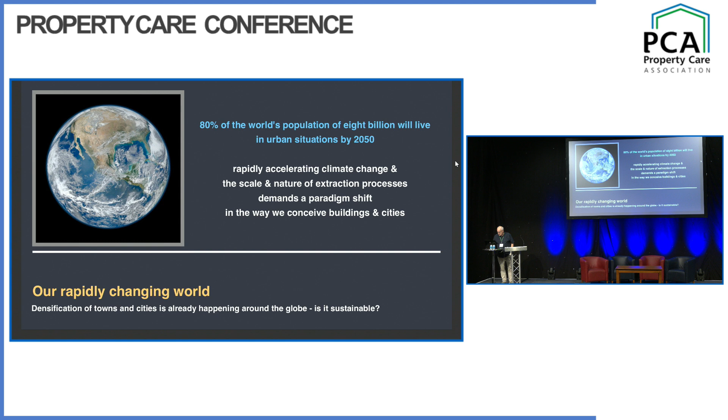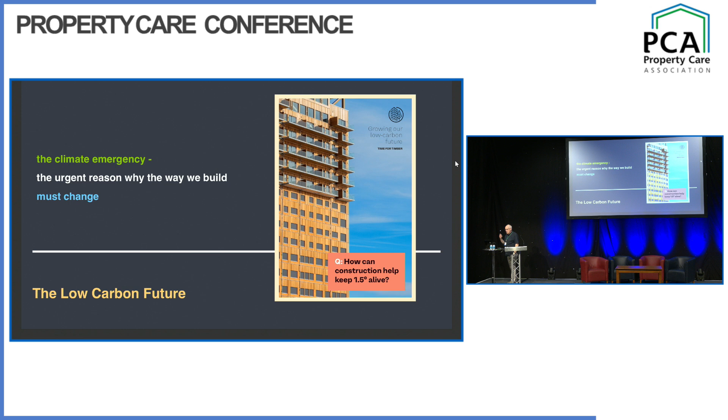So really what we're looking at is, how does this affect us? Now, this is the reason: the low carbon future, we're really serious about it, and whatever dates politicians set for it, how do we achieve it? And we're not achieving it the way we're going about it at the moment because we have an energy crisis, we have a climate emergency, Brexit, post-COVID, cost of living, but in the UK we also have damp condensation, poor thermal insulation, poor air tightness, poor construction quality, and inappropriate use of materials.

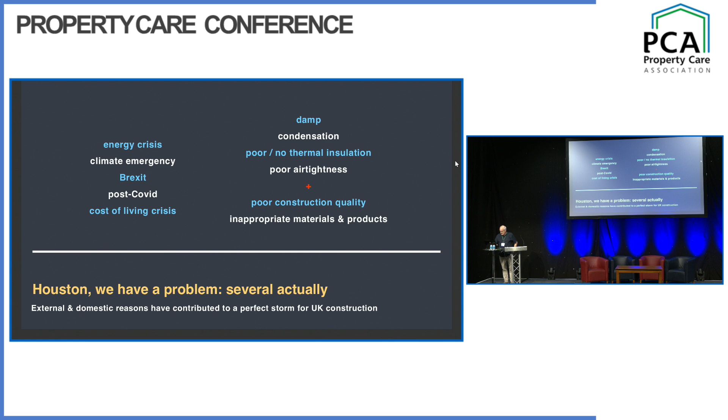So, lots of things to consider, lots of things to get right, and for the PCA members, lots of things to earn income from.

Way back in 2016, Mark Farmer wrote a report for the government, Modernise or Die, and it was absolutely jaw-dropping in terms of saying, if we don't change things, if we don't change the way the industry works, if we don't change the way we use materials, and if we don't train people in the skills necessary to do these things, we have no hope. In 2021, in the subsequent report, nothing had changed. And this is true throughout the UK construction industry. For years, Latham, Egan, all these kinds of reports came out saying we need to change.

Nothing changes unless legislation changes. That's the reality. When legislation changes, everybody in the industry decides they need to know and need to get on with things. But without it, you can't expect much to happen. And so we have a problem, because if we're going to, by 2026, achieve many of the things that were in Mark Farmer's report, we really have a lot to do.

So why mass timber? Now, mass timber, I'll explain what that is in a minute. But there are new imperatives. I mentioned some of them already: circular economy, yes of course, use of renewable materials. Timber is number one in that kind of world because we can grow more timber. Off-site manufacture is certainly more and more important to get accuracy, to get precision in building, to get speed of building, and less deliveries on site, all sorts of things.

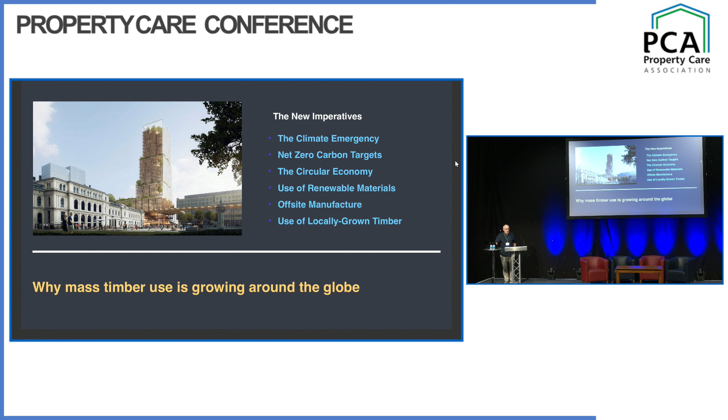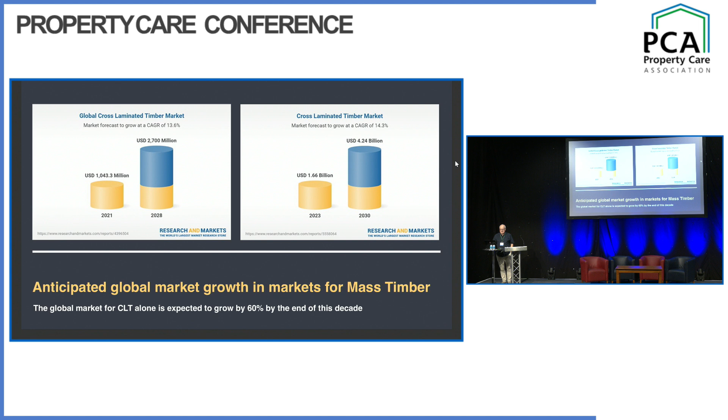And this is why, because you can see the growth here in the market for mass timber. These are two charts looking at just CLT alone, cross-laminated timber alone. But the market internationally is growing phenomenally. It's not so much growing phenomenally here because Grenfell set everything backwards. Regressive legislation after that affected timber more than anything else, although there was no timber in the building. But that's the way regressive legislation works. So, what is mass timber?

Now, there are different characteristics to each of these things. I'm not going to go through that. I'm just going to show you some of them.

Nail lamination, that's basically how it works. Stack board on board, stick nails in. I'm working on a project at the moment to use wooden nails, so we don't use any steel at all. There's a whole world of what we're trying to do with wooden nails. I won't bore you with that.

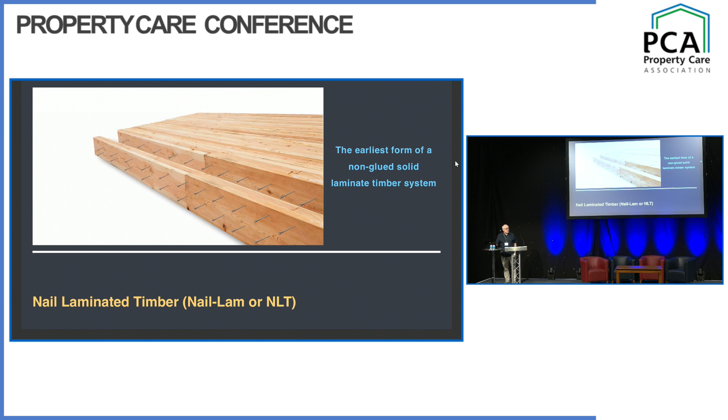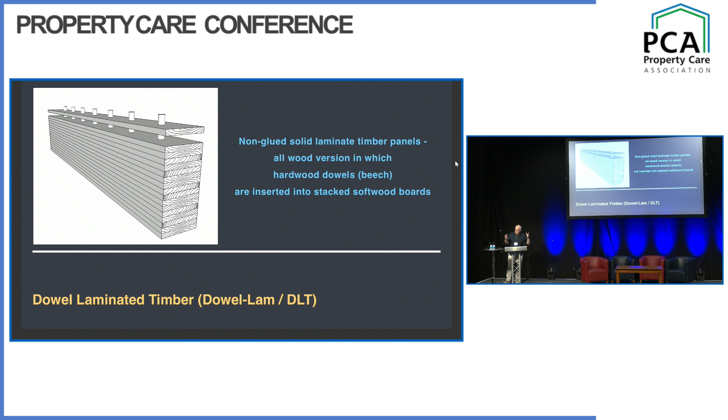Dowel lamination, it's kind of the same thing, but we drill holes and put hardwood rods into softwood. The difference in moisture content means that they lock together once they reach equilibrium moisture content.

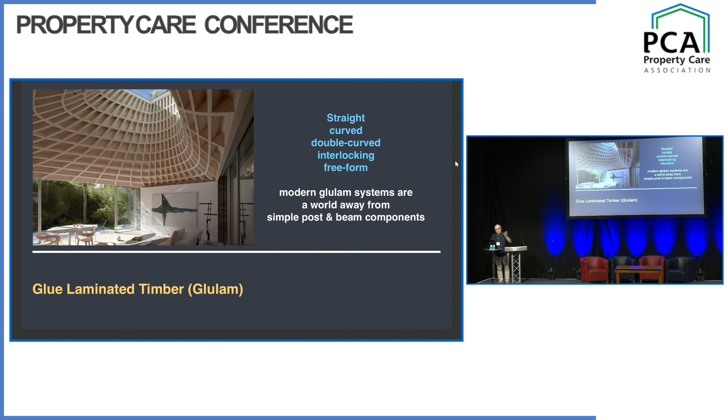Glue lamination, you've probably come across it, but there are lots of different types looking at straight, curved, interlocking, and so on. Some fantastic buildings emerging here in Britain and around the world, really pushing these technologies forward.

And cross-laminated timber, this is just one example, but you might see it as just something new, something that's a fashion item that we don't need to know about. You do need to know about it because it's the fastest growing construction product, I think, anywhere in the world at the moment.

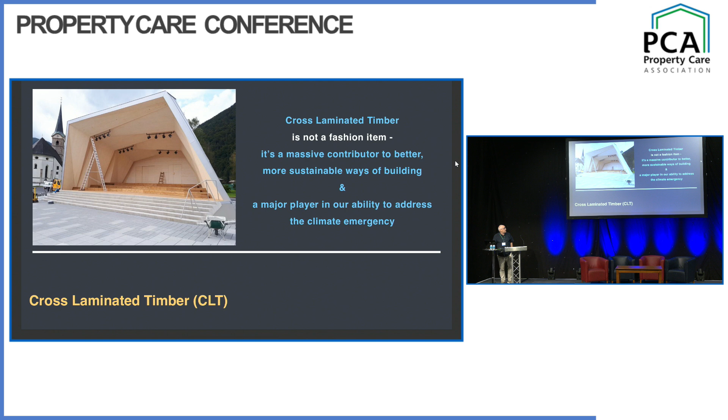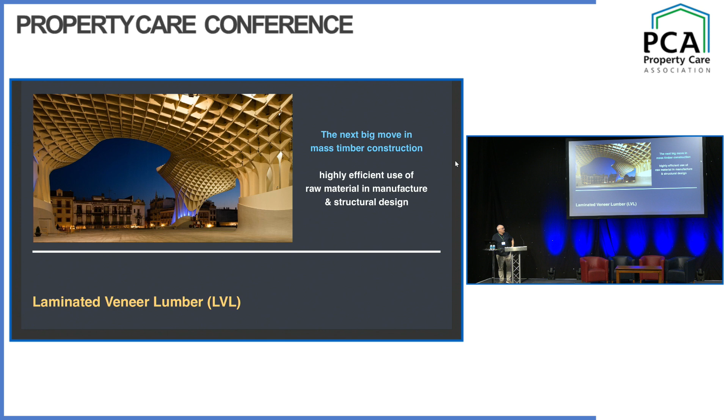And then laminated veneer lumber. So I'm showing you sort of extreme examples of what's being done with these technologies. There's a lot of simpler buildings around, but these are the ones that I think are pushing the boundaries, pushing the research, pushing the technology.

And there are lots of reasons, advantages, benefits for using these products. I've listed some of them there. I'm not going to read them all out because I've only got 20 minutes, and if we want to get out before it's dark, we'll need to crack on.

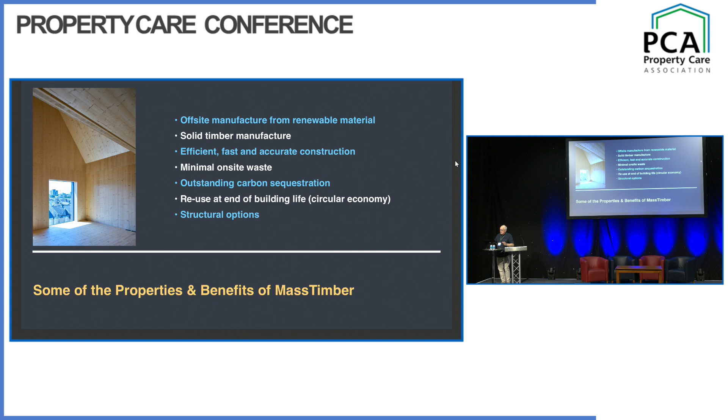There are plenty more properties, but I think reduced weight of the buildings, reduced deliveries to site, carbon sequestration is a big part of it in terms of locking up carbon for the future.

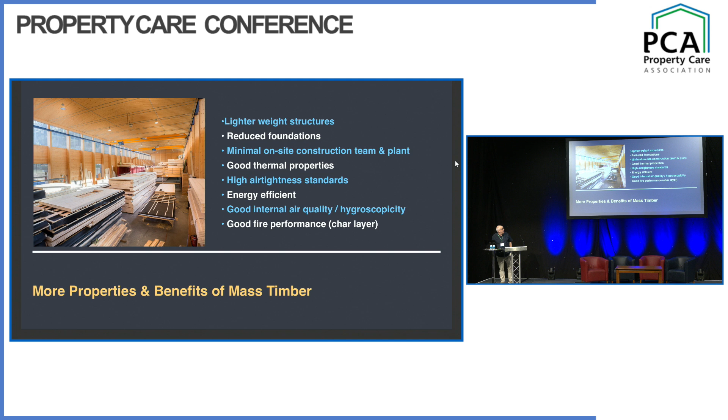Very high air tightness standards, very good thermal efficiency, and this came up earlier talking about schools and so on. I wanted to put this in to say, when you expose mass timber surfaces, big thick panels of wood, but you leave the surfaces exposed, you get the benefits of wood's hygroscopicity. You get the wood kind of absorbing moisture, releasing moisture, very good internal air quality.

And there are lots of carbon benefits. I'm not going to run through this because this is for kind of consenting adults only about how you construct the buildings. So we won't bore you with that. I do courses in that. That's quite separate.

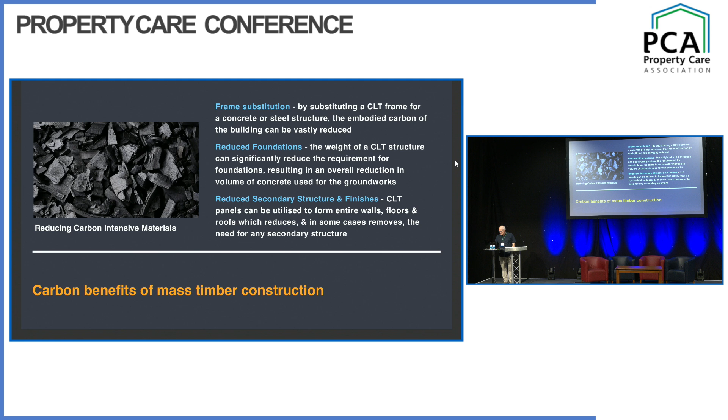But what is cross-laminated timber? Basically, we take strips of wood, we put them together, we glue another layer of them at right angles to it, and so on, until we build a panel.

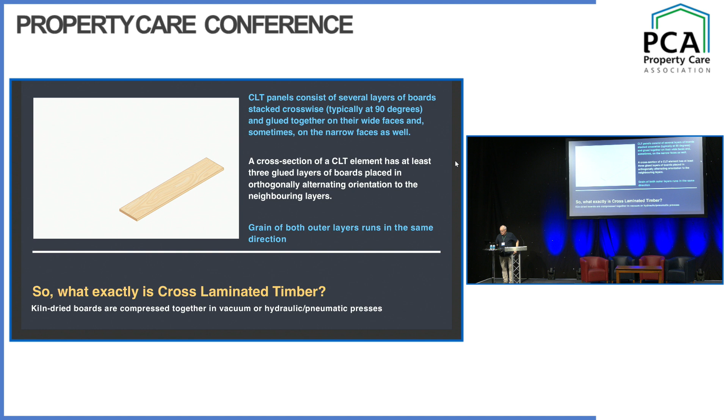And you can see some examples of these here. I haven't got a pointer. I don't think, oh, I do have a pointer. So these are different layups of, you usually have odd numbers so the outer faces of the panel, timber faces in the same direction. I'm not going to give you a whole lecture about this, just to show you some examples, because when we come on to it later about issues for PCA members, you'll see different types of things here.

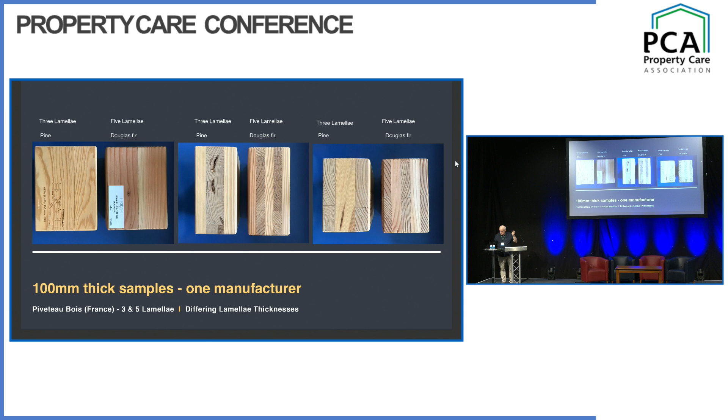Now, if I go back one, you'll see here these are glued down those kind of lines. They're not necessarily glued across where the wood crosses, and we'll come on to that. In this example, they do get glued across there as well as across there. That's important, and I'll come back to that.

First CLT building in the UK. People keep telling me, people in the industry who've never used it and so on, say well, this is new, this is risky. We've been doing it for 25 years. It's not new, it's not risky. In fact, when people use it and they begin to realize how efficient it is, they become kind of evangelical about it, maybe too evangelical.

Excuse me, I'm looking around here. Oh, what is it? Oh, can of water. Who knew? Give me one moment.

Got to keep going, 20 minutes.

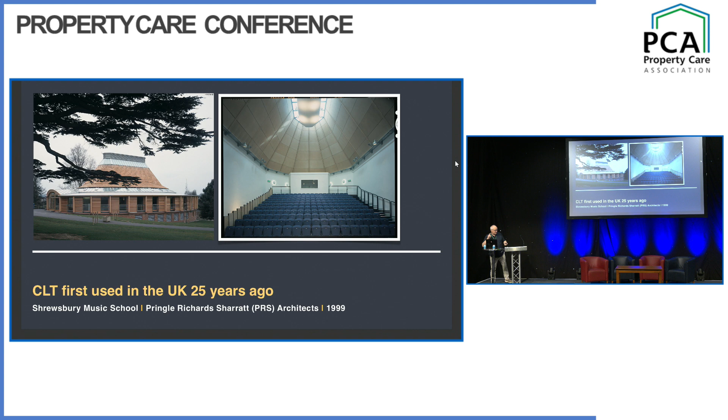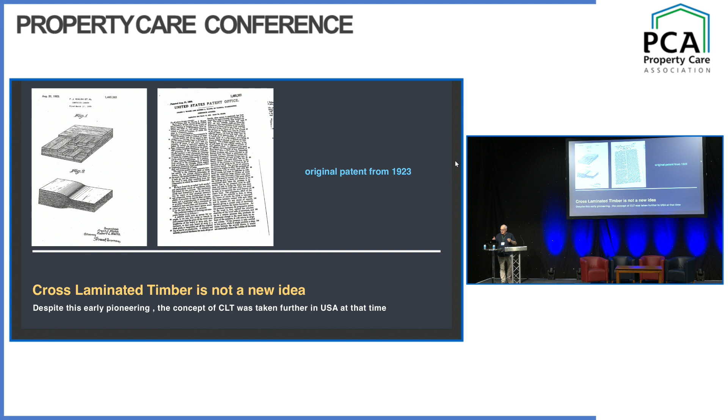It's not a new idea either. It's been around since 1923, so 100 years, when it was first patented in the United States. Unusually for the United States, they didn't take it much further at the time. They're going at it like a dog at a bone now, building factories everywhere and huge amounts of buildings, particularly tall buildings, in mass timber all over the States, changing the legislation from state to state to encourage more timber building. We've done it the opposite way around - we want to discourage it at the moment, and that's really not the way the world's moving.

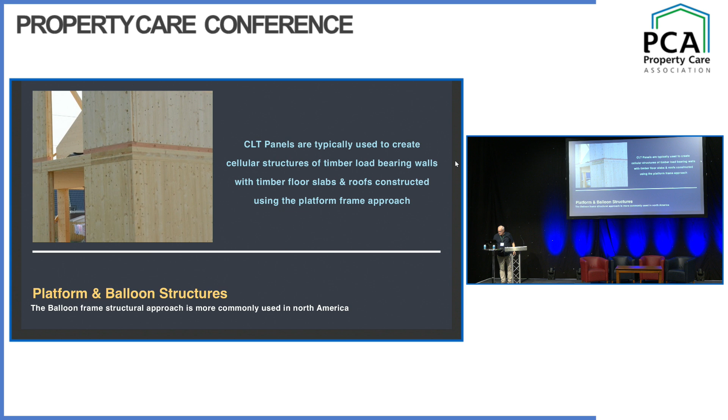So basically, you see how it's constructed: wall panels, floor panels, basically platform frame construction, for those of you who are interested in that. Stability - you can see in this example, this was the first tall timber building in the world for residential structures. It was 9 stories in London, East London, and it's kind of a honeycomb structure, so the loads are all distributed, so it doesn't suffer from a thing called progressive collapse. It's a very efficient structure, but this changed the world.

Around the world, as soon as this was built, way back in about 2012 or so, maybe a bit earlier, engineers started looking at it and designing 25, 30-story timber buildings. And that's the way the world is moving now - we're seeing buildings that are more than 20 stories high, purely in timber.

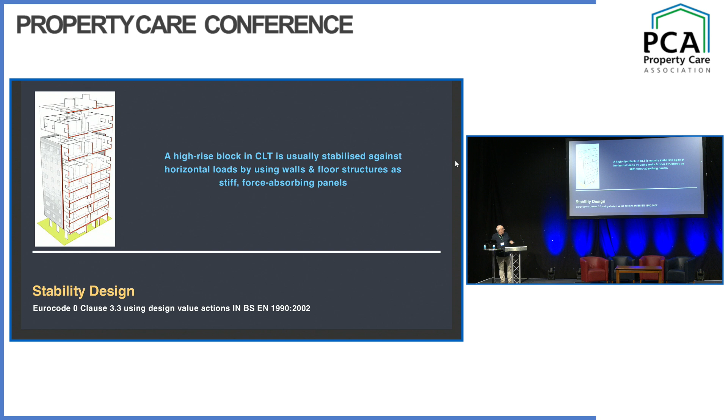Then the elephant in the room, Grenfell. As I said earlier, there wasn't any timber in Grenfell, but the legislation that came in England and Wales said above 18 metres, the whole wall construction needs to be non-combustible. For those of you who understand the nature of building construction, you realise how laughable that statement is, to get all the layers in a wall to be non-combustible.

But this is 10 stories in London, and London was leading the world in terms of tall residential structures - solid timber, everything there is solid timber. Then Grenfell changed things, and we began to realize that we have different areas of construction in terms of timber. We have low and medium-rise buildings, high-rise, distinct structural technologies in terms of lightweight structures or mass structures.

Three risk groups, because different things need different kinds of consideration in terms of insurance. The particular things we're talking about here: susceptibility to fire and moisture, durability and repair, concerns over quality of design, concerns over competency - this word comes up all the time. And that partly goes back to what I said earlier: if you're not trained in it, you're not competent in it. That's what we need to change.

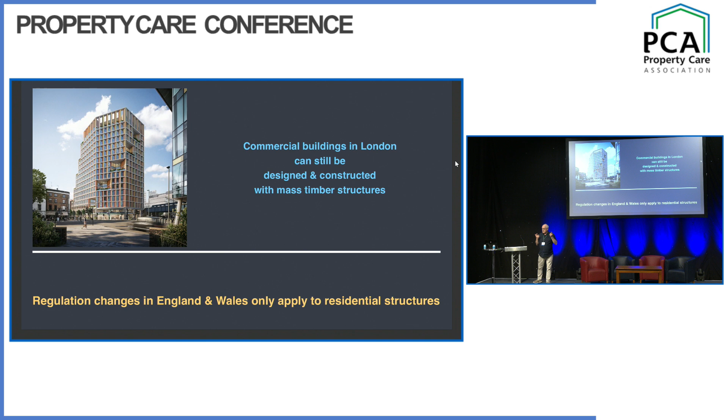So the regulations that came in - and I keep hearing it from people, 'well, we can't build higher in timber' - the regulations only affect residential structures. They don't affect commercial structures, because those are still happening, and they're happening taller. So there's a kind of contradiction there, but I'll leave that with you.

And most recently in London, hardwood laminated veneer lumber. This is a frame that's completely made of hardwood. Laminated veneer lumber is little thin 3mm strips assembled like glulam, so all the wood runs in the same direction. But this is in the centre of London, and when you think that the London Building Acts are predicated on the Great Fire of London from 1666, and after that timber was kind of outlawed, we're back in it now because it's the fastest, quickest way to build effectively in very compact sites - you don't need huge amounts of storage space. You're building very quickly, and very efficiently and accurately, because you're within 1 or 2 millimeters precision in terms of the structure.

Then we're talking about tall timber buildings around the world, and they're going up everywhere. So you have to be cognizant of the lessons to be learned from that - things to do with fire regulations, fire mitigation systems, and so on. There's a lot of research now, huge amounts of research in all of this.

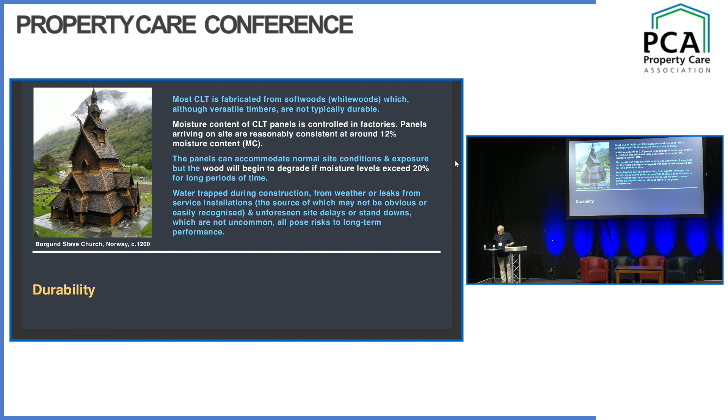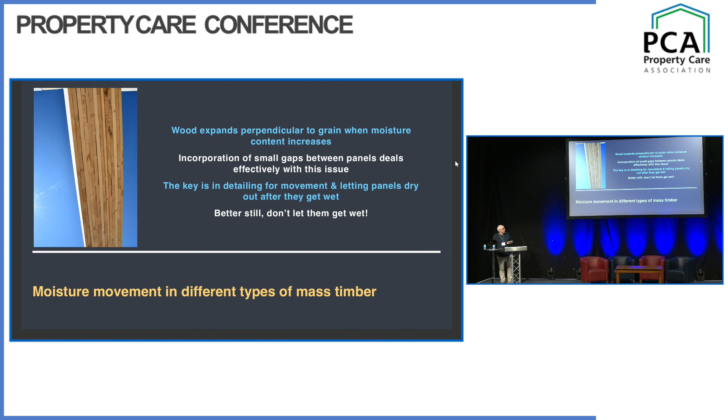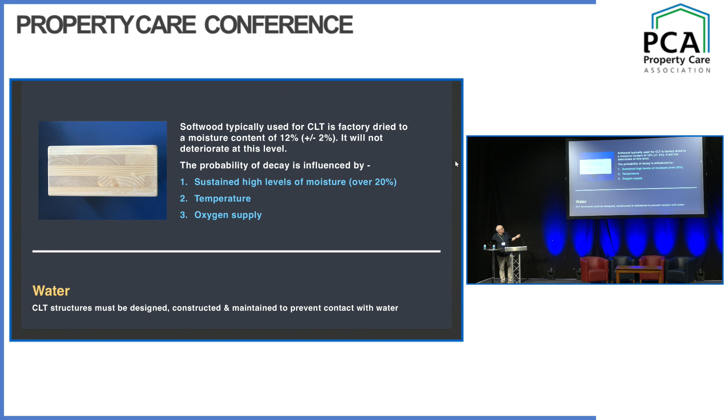Then we move on to durability, and you get buildings that are hundreds of years old that are still standing, made of wood. But we're looking at it from a different angle, because all of you in the room are aware of moisture movement in timber, so I'm not going to linger on that - the important thing is not to let the wood get wet. That's just standard. But different things affect wood - you can see here, once moisture level is over 20%, you have a problem. Temperature and oxygen, that all affects it.

And we get long-term exposure. Now, I put 2 slides here because one interesting thing is when you cross pieces of wood like this, you'll find at the crosses moisture can penetrate between the strips of wood and down into the next layer, and down into the next layer again. Once the moisture's in there, it's very hard to dry out, almost impossible. I put this slide in because I mentioned it earlier - you can see here the gaps that begin to emerge, slight shrinkage, but the panels themselves are dimensionally stable.

In this particular example, there are no gaps, so there's no possibility of water getting into the body of the slab itself. It might happen between where they connect to each other, but there are details to solve that.

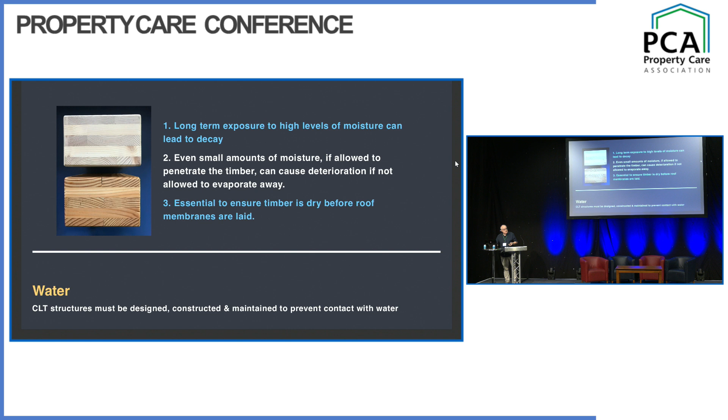End grain areas, we know we have to treat them because that's where the moisture gets in. But then when you see it on site and you see the problem when contractors have no experience in doing these things, they don't clear the water away quickly, they just let it seep in, or they sweep it to another area and just make that area wet as well. So that's the start of the problems.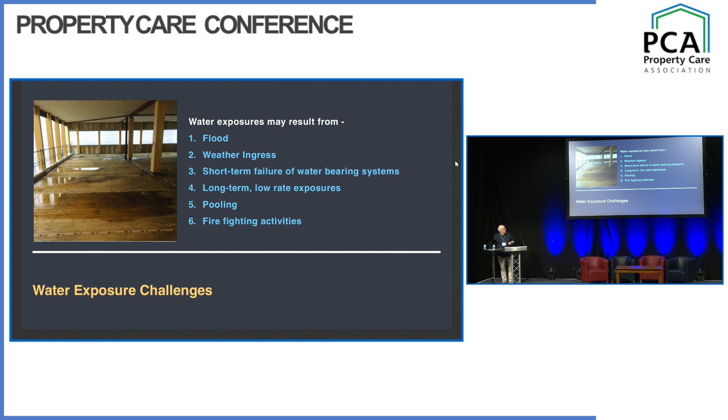Then you see what the issue is when you actually leave it and let it get damaged, because you have a whole series of things that happen with water exposure and what we need to do to mitigate that and what we need to do to be aware of it in order to prevent it happening.

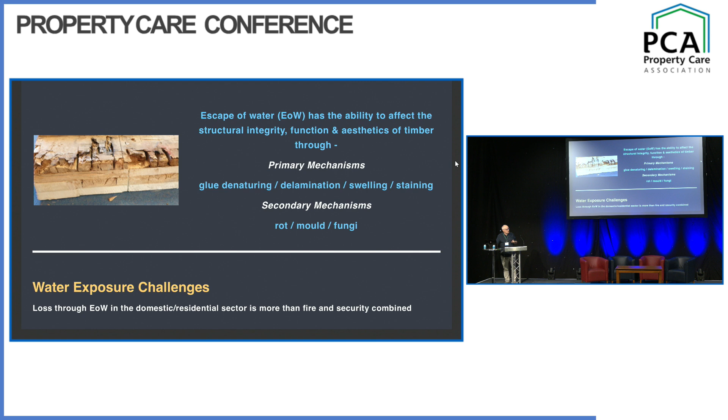Part of that is now we're looking at a whole series of things that happen in the design phase. What happens when wood gets wet and continues to get wet, or the moisture is retained within the structure, either because the follow-on trades don't understand it particularly, so they'll put down a roofing membrane on top of a wet slab, seals it all in, you can't dry it out, and what you get is internalized rot, and then you get into big repair bills because you're having to really take the building apart to solve the problem.

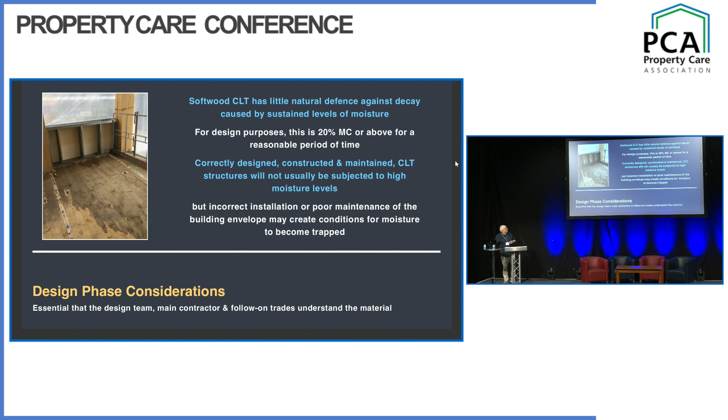Moisture risk management, there's a whole series of things here that can be done, and I've mentioned a few of them. But the big thing really that we're looking at and what to talk about today is moisture management plans, because that really is becoming the most important thing now.

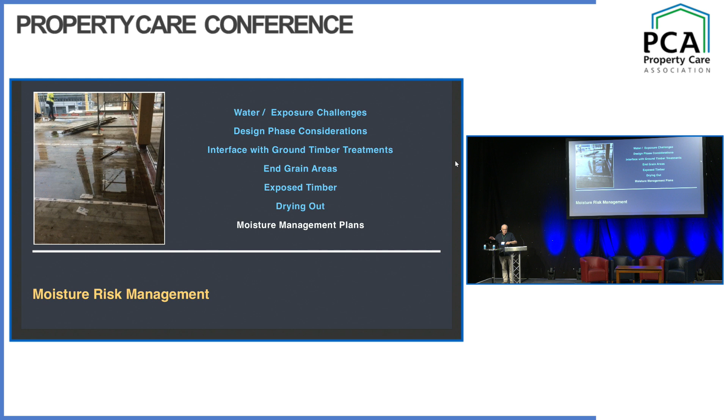At the beginning of construction, the contractor not only has to have a proper moisture management plan for the whole building operation, but also has to effectively impose it on all the subcontractors so that they understand their role in the sequence of construction, not to seal in moisture.

These are really the stages of a moisture management plan, and I think it's something from a point of view of PCA members to think about: this is an area of work that is coming for you. If you're not already involved in it, it's coming. So where are the opportunities or the things that require your skills and services? Really advising on, for a lot of contractors, big or small, what you need to do to develop a management sequence that makes sure you're building effectively.

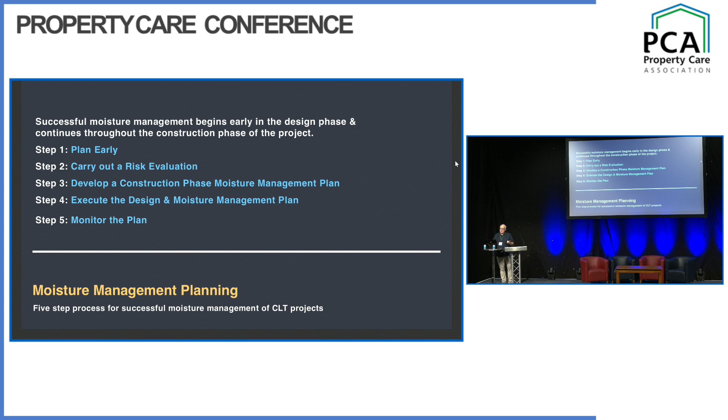There's a whole range of things here. I'm just flashing them up very quickly here because I see a man looking at me and saying, 'Woo, time.' He's in denial.

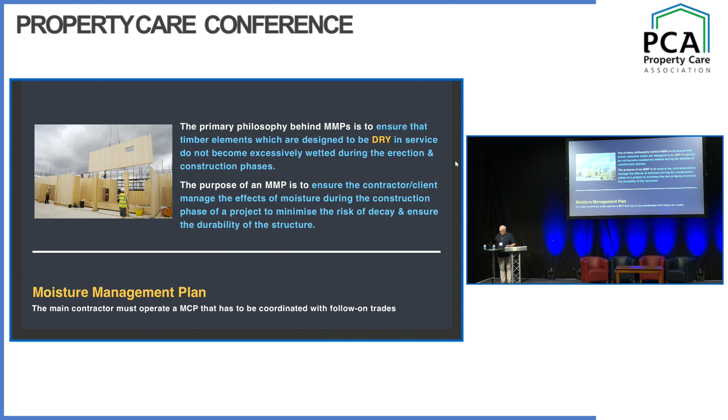So, talk about the future. There's a whole series of things happening. The whole thing about mitigating climate change and so on is we're having to look at different materials, different ways of constructing buildings, different ways of making sure we're using renewable materials, making sure we can do things in a way that helps decarbonize the environment.

And I mentioned earlier about the whole way in which wood sequesters carbon. As I said, there's a whole... I'm condensing about 25 different courses into one 20-minute session here, so forgive me.

I think the point about this is when we're repurposing existing buildings, we're also looking at mass timber interventions or additions to buildings. We're seeing quite a lot more now of existing buildings with 2 or 3 extra stories in timber because they are lightweight, so you can build on the existing foundations without having to underpin buildings and so on. So there's a lot of different things happening.

A lot more research and development is going on now in this world than in, say, steel and concrete, because huge amounts of stuff's already been done there. I see it with PhDs and theses for universities and so on. You think, 'oh, not another thing on an area of concrete that's already been done,' but it's just happening everywhere.

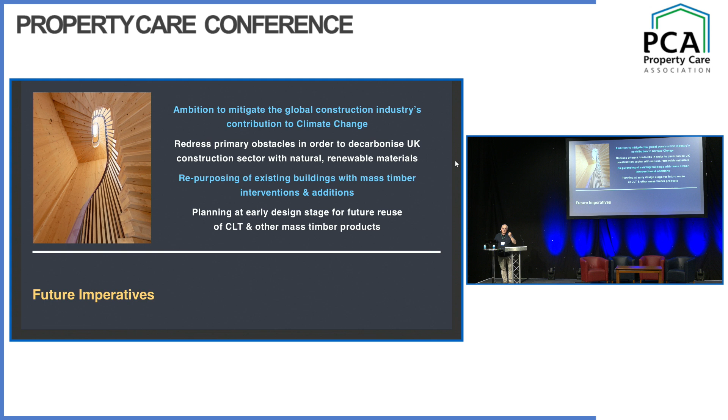I think I've cracked through it pretty quickly there, but we have lots of courses we do in all sorts of things, and I'm happy to do courses for PCA if they want to find out more about all of this, because I think there's a huge area of issues that depend on the kind of services that your members provide. So on that merry note, I'll stop there.